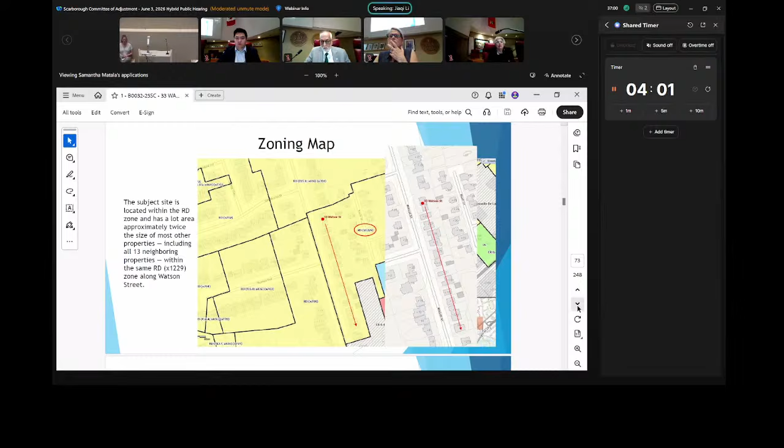Next slide, please. The subject site originally consisted of 2 standard residential lots, each having a frontage of 15.26 meters and a depth of 34.92 meters. A former owner acquired both parcels and merged the titles together to construct the existing bungalow. As a result, the current utilization of the subject site is significantly below what is permitted under the zoning bylaw and is not consistent with the prevailing development pattern within this zone.

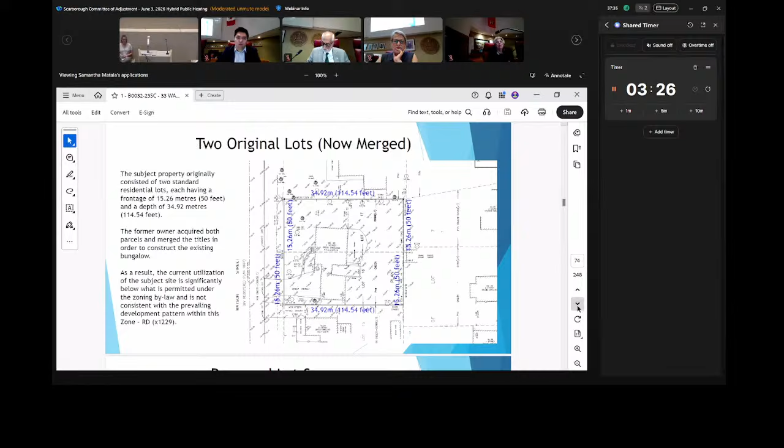Next slide, please. The application proposes to sever the oversized lot into 2 zoning-compliant lots with no variance below the minimum zoning requirements. Part A, on the north side, will be the retained lot, and Part B, on the south side, will be the conveyed lot.

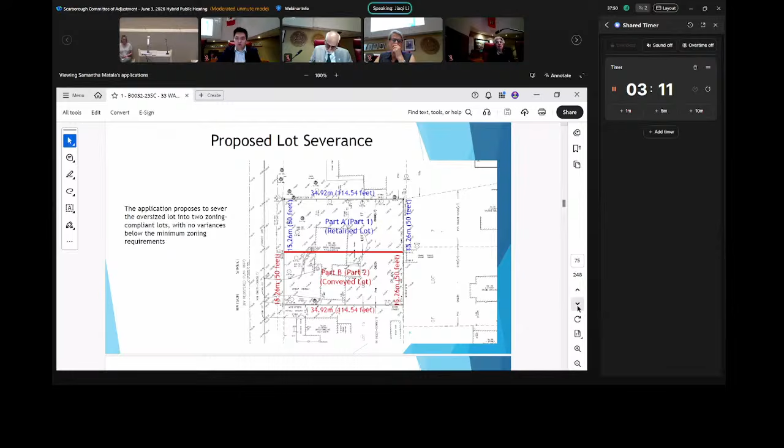Next slide, please. According to the zoning requirement for frontage within this RD zone, the minimum frontage is 12 meters, while each of our new lots will have 15.26 meters. The minimum lot area requirement is approximately 360 square meters, whereas each of our new lots will have 532.9 square meters. So both size and dimension significantly exceed the zoning standards.

Next slide, please. Following lot severance approval, we will complete detailed building design for a single detached dwelling on top of each lot, at the building permit stage, ensuring full compliance with all applicable zoning bylaws and city requirements. Thank you so much.

Okay, I have a question for you here from Mr. Clay. Thanks very much. Sir, I think it's fair to say that a lot of the folks opposed to this application are very concerned with the trees. Maybe before they speak we can get some clarity. We understand that you've now satisfied urban forestry - is that correct? Yes. Okay.

Staff, could I indulge you to pull up the arborist report? There's a page with a site plan with a map on it - wonder if we could call that up. Just scroll down until you get to it. Oh, you just missed it. Yeah, back up. Sir, this is your site plan, which looks like it's identifying the trees to be removed.

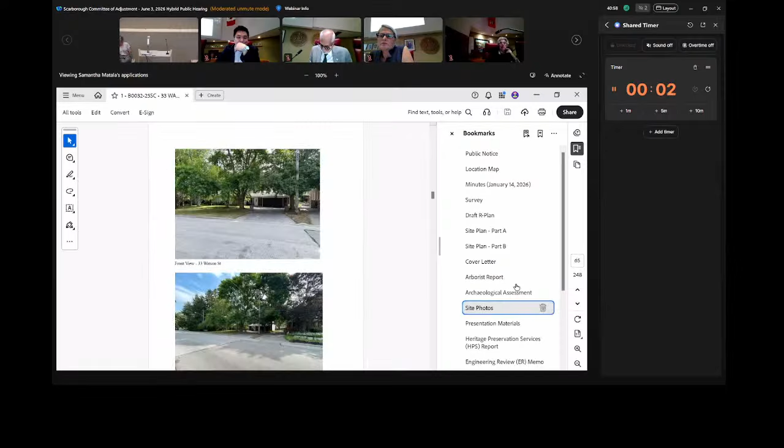I'm sorry, I don't have it on the Committee of Adjustment file, but I do have an updated version provided to Urban Forestry. I don't know what happened. Maybe I could ask you to take a look at this map, if you could call that map up again.

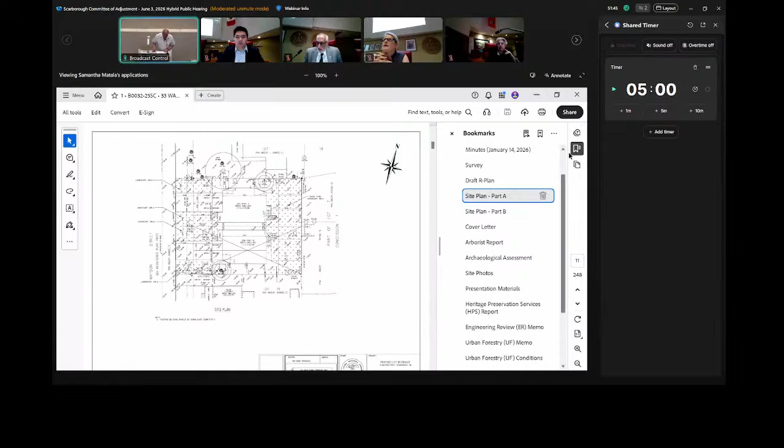I have a question, sir. You mentioned the driveways a number of times—are you suggesting these houses could be built if the driveways were configured differently? Even if you put them side by side, you'd still have to remove at least one tree, right? Well, there's a driveway in place right now, and the property is 100 feet deep. You could move the homes back, not disturb the trees, and utilize one double car driveway, possibly shooting off to the left. So you're suggesting a mutual driveway that splits off at a certain point? Correct, correct. All right, I just wanted to ask that.

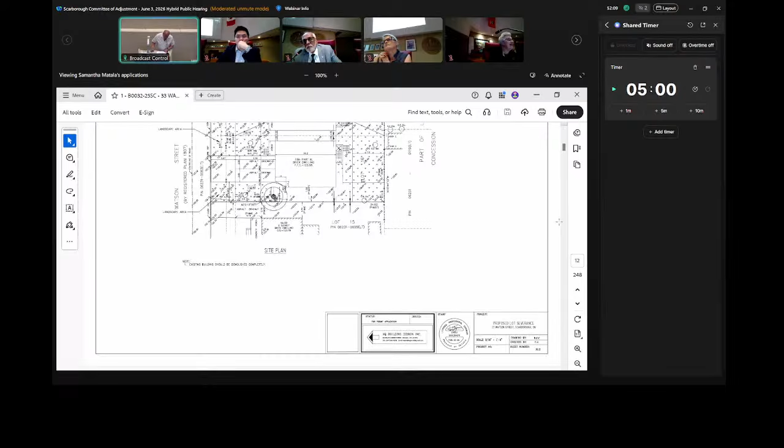Anybody else have any questions? Mr. Khan—thank you, Madam Chair. Sir, did you have any meetings with the developer and raise your concerns? Good question, and I did. I believe we had a meeting on the property in October 2025, where I met the applicant and his father and had a quick chat. I gave them my card so they could reach me any time, and suggested we talk together as a community to work things out. They were agreeable at the time, but I haven't heard from them since until now. Thank you. Okay, anybody else? Thank you, Mr. Yarn. Thank you.

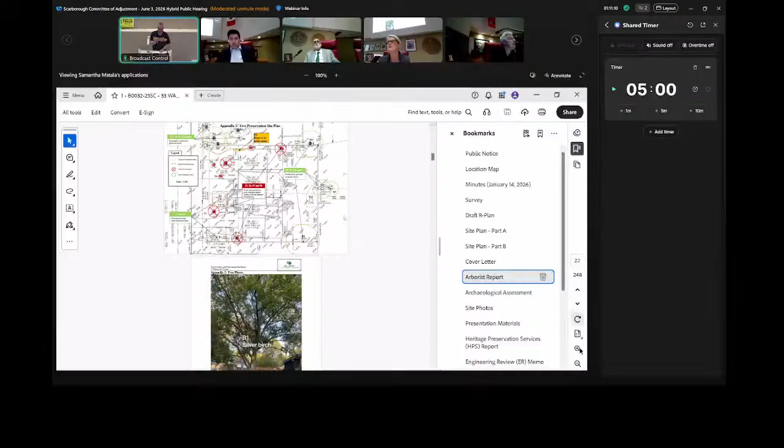The issue is that that tree would then be subjected to the traumas associated with the removal, as referenced by the other speakers. Understood. Any other questions, panel members? Thank you very much, sir.

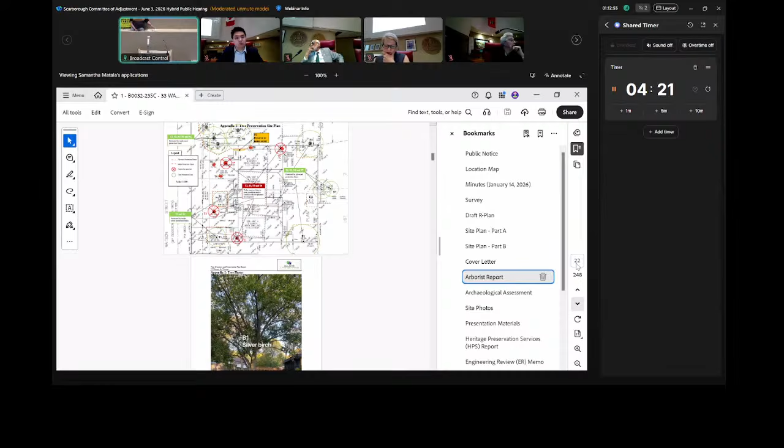Well, not really. I mean, I think the construction is going to impact some of the root base, which is a concern from the residents, so I guess if you could speak to that. But my question is, there was reference to 2 driveways, right? And there seems to be a thought by the community that it could be reconfigured, that you maybe only have 1 driveway to go into both properties to minimize, and maybe you could save another tree that way. And my question was, there's an existing driveway, and it doesn't appear that you're using that. It appears you're moving yours slightly to the left if you're facing the houses you're building, so that's my question.

Sorry, can I ask the owner, if he's sitting right beside me, to answer this question? Yeah, as long as he identifies himself for the record, that's fine.

Hi, myself Li. Sorry, what's your name? Xiaofeng Li, he's the owner. How do you spell that, please? X-I-A-O. Okay, and then L-I or E-E? F-E-N-G, okay, and L-I. Okay, and the address? 33 Watson Street. Okay, go ahead, Mr. Li. I'm just going to have to ask him in Mandarin, and then I'll be the translator, if that's all okay. Right, fine.

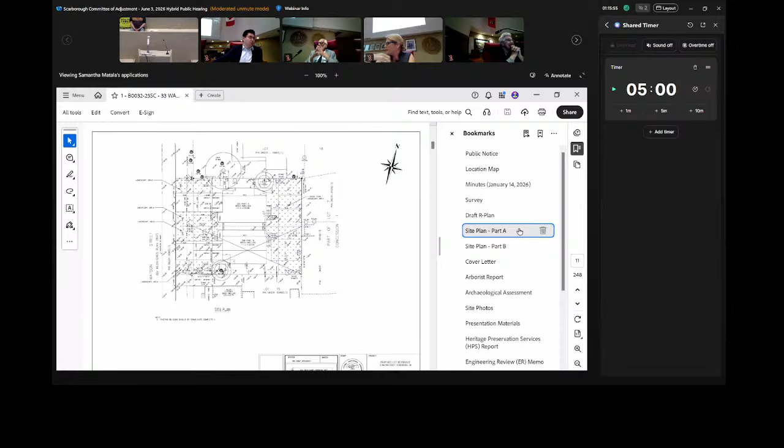Okay, can we just ask, I think you raised a very good question, why? I mean, all you'd really have to do for that Part B dwelling would be, instead of having a straight driveway, to have a curved driveway using the existing curb cut and reconfiguring that driveway with a little bit of a bend to it, which might actually preserve one of the trees you're planning to remove.

I'm sorry, we're only removing 2 unhealthy trees that are almost dead. There's no healthy tree that we're proposing to remove.

Right, but that way you would only be removing one tree. Well, I'm looking at the picture, they don't look dead to me, but, you know, fine.

Sorry, I've been negotiating with Urban Forestry, and according to their observation, 2 of the trees we're proposing to remove are very, very unhealthy, and even if we're not developing anything, we still have the right to remove 2 of the trees because they're very unhealthy and they're in danger. So that's it.

All right, well, I think we're asking these questions just to kind of maybe mitigate some of the concerns about the tree removals here. So if it's one less tree to remove, that's always a good thing, right? And Madam Chair, Ms. McCauley?

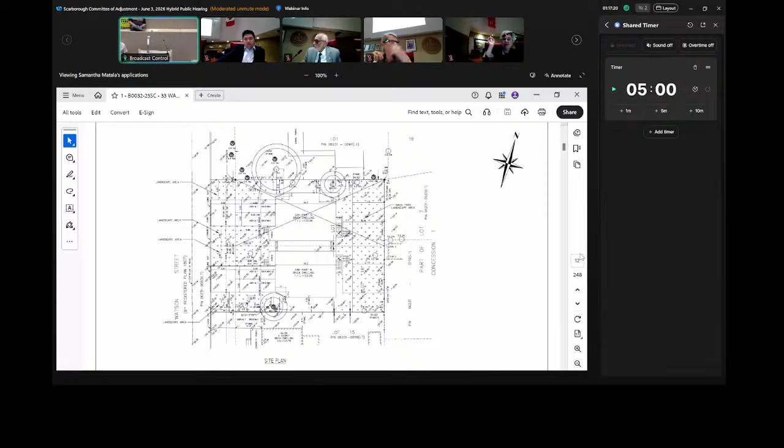Thank you. I'm a little confused as to what trees they are proposing to preserve. We have the map, or the plan, that's been on the overhead a couple of times, but it shows 6 trees to be deleted. Could we bring that map up, and would he identify, he says only 2 trees are being deleted? Would he then identify which 2?

If I can clarify what was talked about in the beginning, number T7 and T3 are the ones being removed. Everything else stays. Yes. Okay.

Okay, so that's the 2 toward the left-hand side there. So T7 is in the driveway. T6 and T5 are also in the driveway. Are they going to be removed?

I think so, because they're under, I think, 30 diameter. Sorry, they're under 30 centimeters, so they're not being protected. That's I believe what Urban Forestry says. So in fact, T6 and T5 and T7, all 3 of those are being removed.

Yes. Okay, and then on the other side, you're showing T2, T3, T7, and T9 to be removed. T9 is at the top end.

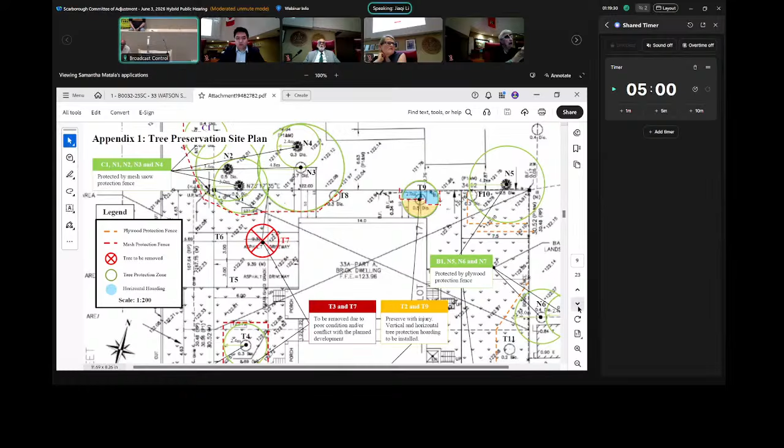No, it's T9, not... will not be removed. Sorry, can you scroll down a little bit?

If I can just clarify, on the map we have, which is not the updated map, through the chair, T7 and T3 are being removed. Can you just confirm T6 and T5? Are they the diameter that you don't need a permit for to remove? Yes. Okay, T9 and T2 are remaining, right.

Through the chair, the plan currently on the screen is the revised plan. Okay, so the one on screen is the new plan that we didn't get.

T3 is also in the driveway, and it's to be removed. And T2 is also to be removed? No, T2 will not be removed. Okay, but T3 will be removed because it's in the driveway. And it's in poor condition, yes.

So in total, I've lost track here. How many trees are you removing? You mean the trees that require a permit or do not? No, I'm asking how many trees on this property are you removing. Four: T6, T5, T7, and T3. Okay, thank you. I do want to state again that two of these trees do not require a permit to remove. They can be removed as of right because they're under the diameter that requires a permit.

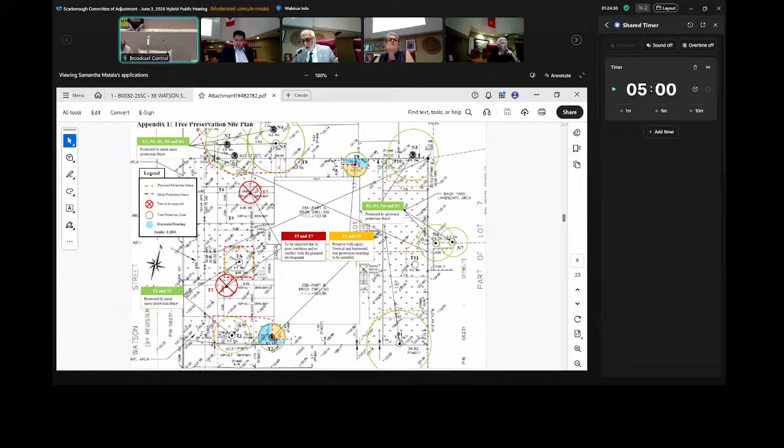It looks to me that probably somewhere down the line, the coordination between yourself and the public or the people over here has been minimal. Had you had a meeting with the presence of the urban forestry representative, I think the problem would have been solved long ago and these people wouldn't have been here and you would have been notified what to do. Now, I don't know how to suggest, except asking you a simple question. Did you ever meet these people or had a committee meeting?

No, I haven't. I have met the owner at 37 Watson Street, I believe, Mr. Bill. I've had a conversation with his wife, Lauren I think, and we were discussing how to protect the N3, the Dawn Redwood. After negotiating with Urban Forestry, asking to stay 4.8 meters away, and then we added an extra meter of overdig, so that's 5.8 meters in total. That's all the neighbors that I've met.

Sir, that is appreciated. You met one person, but I have here the very first person who spoke who is a representative of some sort of committee. Had you had the opportunity to meet them, it would have gone viral and everybody would have been notified and more people would have been involved. Now, I'm short of words here to say, and I don't want to use.

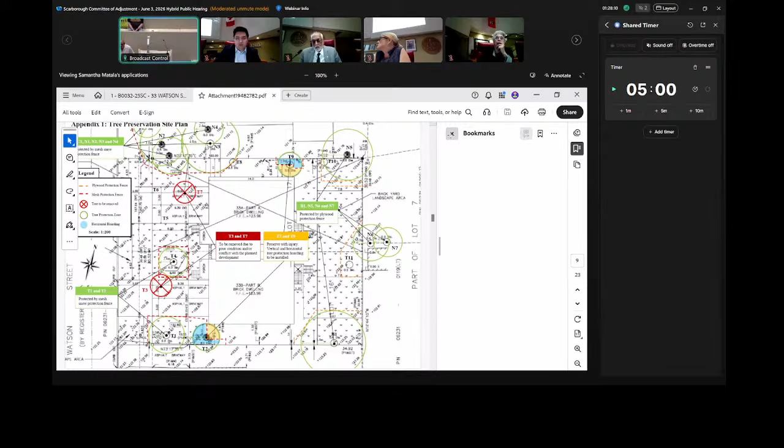One question, Chair. Can we just call up the arborist report again, please? Guys, if we could go to the table, just want to confirm.

It's right there. So T3 is a Norway maple. What does the letter P stand for under condition? Poor. Poor? Poor, yeah, I just looked it up. I was looking for the legend, couldn't find it, finally found it. Oh, fair. So good, fair, poor. Okay, so T3 is what you're referring to, and it is poor, and T7 is the white spruce, and it is also poor. Yes. Okay, thank you, Chair.

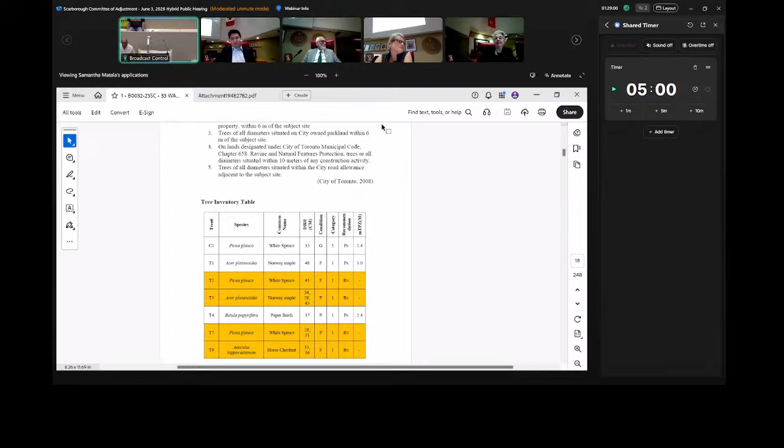You're welcome. All right, we're in committee. Ms. McCauley. I am frustrated, probably as frustrated as the residents in the community.

The desire is to keep the trees, but what we have in front of us is simply a consent application to sever the property. As a condition of consent, we can determine that tree preservation is highly desired, and can approve the tree preservation plan, or at least grant the condition of requiring the tree preservation plan to be approved. However, the one thing we haven't done, and we're not able to do under a consent application, is look at the dwelling units themselves.

We've talked a couple of times about the driveways. We've got a double car driveway. We've got the previous plan. In fact, the plan with the trees on it that I'm looking at was to provide 2 dwelling units with a driveway sort of in the middle, leading to a double car driveway and a double car driveway.

As I said, we don't have the information here of the house plans. That will be a later decision, one that's at the moment only up to the applicant and our building department, to ensure the building is in compliance with all the zoning bylaw. As I said, I'm frustrated. We're building big houses with double car driveways while trying to preserve the trees, and all we've really got in front of us is a consent application to divide the lot in half. I'm putting this forward as a frustration, in case committee members have a suggestion.

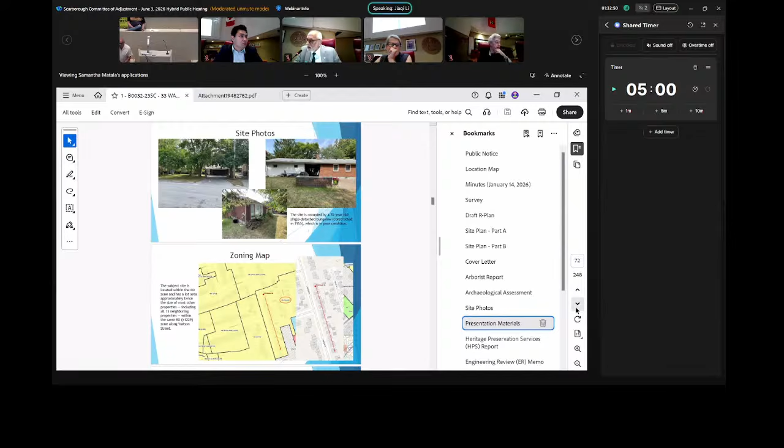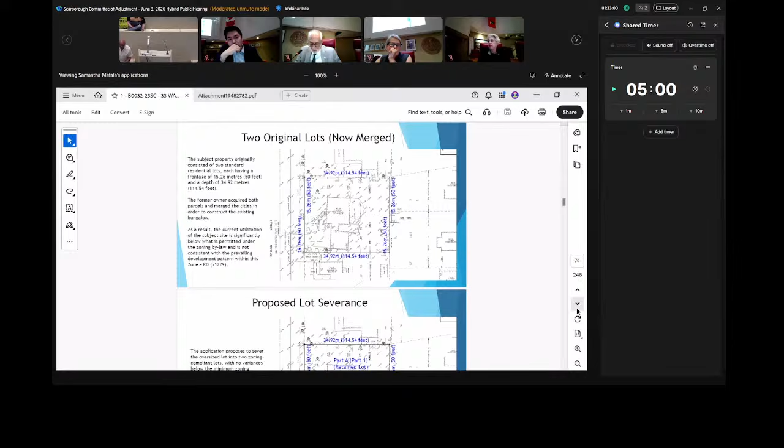Since we're out of committee, can you just clarify, are you intending to build single-family homes or duplexes? Because one of the residents did raise that. Right, so this is a consent application for two zoning-compliant lots, so there's no variance for frontage or area. Duplex is a permitted building plan, so is single detached. I just wanted to clarify, we're not proposing semi-detached, it's not going to be permitted. Whether it's duplex or single detached, I have to confirm with my father. It really depends on the cost of construction and everything else, but the building envelope will be the same. All right, so you haven't made a decision yet on whether it's single-family homes or duplexes, right?

Yes. Mr. Howe wants to ask you something else now. Just a quick question, Mr. Li. You currently have the right to apply to urban forestry to remove the poor condition trees, even if you do not proceed with the consent to sever application. Is that correct? Yes. Okay, that's it.

All right, is there any other questions before we go into committee? Okay, now we heard Ms. McCauley's comments. Anybody else have anything to add?

Mr. Howe? Thank you, Chair. I can comment. I mean, I don't like the fact that the applicant is not preserving T7 by adjusting the driveway location. I think that is a possibility. However, as I asked earlier, I do appreciate the fact that the applicant currently has the right to apply to urban forestry, regardless of the consent to sever, to remove the two trees as of right due to poor condition. So in light of this, I don't see the urban forestry application should be a barrier to approving the consent application. The consent, I don't see any problem with it, and it wasn't something that we heard problems from the speakers here today as well, and it's something we considered last time. So that's where my view lies currently. Thank you.

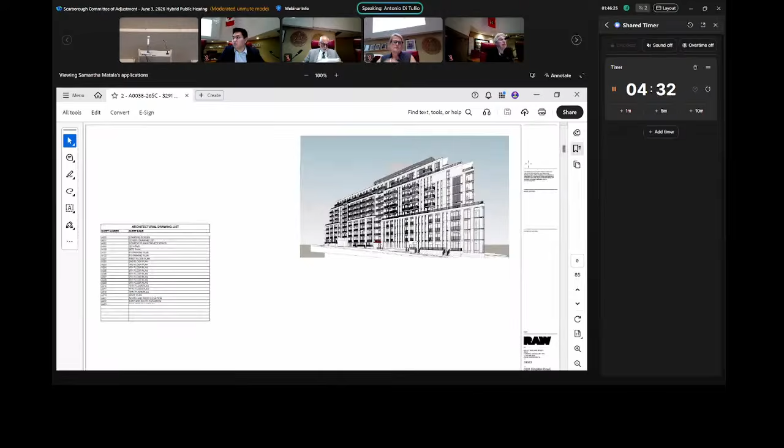Our issue is primarily with variance 9 regarding the 7.5 meter soft landscaping strip. It seemed that the bylaw examiner decided to take a binary approach and in essence excluded it in its entirety, which we think is incorrect. A scalpel approach would have achieved something more appropriate.

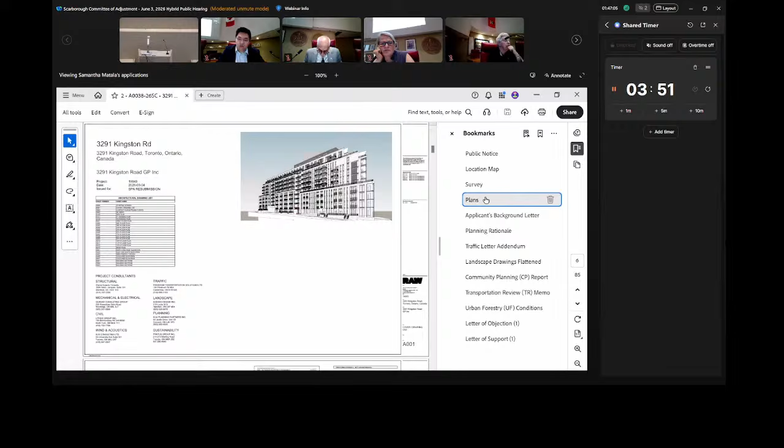That said, we've spoken with LCH and they've been cooperative, and as have we. We just want to make sure our concerns are addressed, primarily because we have many bordering trees. There are stormwater management issues that we are concerned with, and the agreed upon plans at the OLT that you see before you address those concerns. Notwithstanding that variance 9 is a little too broad in our opinion.

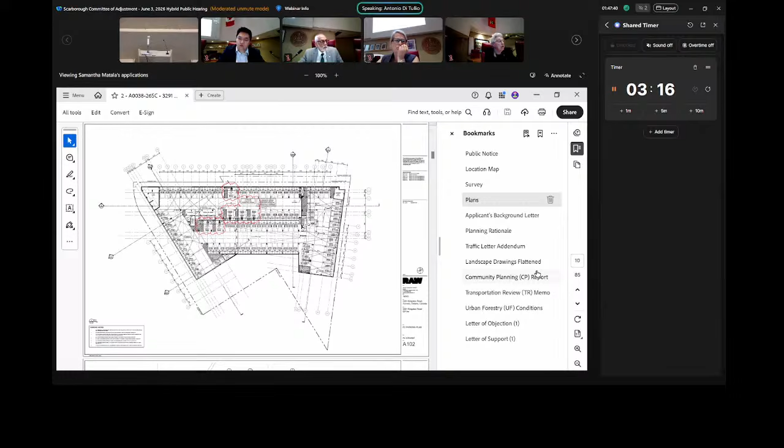LCH in their cover letter to you dated May 27, 2026, has requested, if you look at page 3 on MV9, their wording: we would suggest the committee add a condition of MV approval requiring strict conformance with the submitted landscape plans, as it will give the residents of 6 Windy Ridge comfort that the approval and agreed upon landscape buffer would remain. We respectfully request that the committee adhere to that request, and we are echoing the same request that the applicant has put forward.

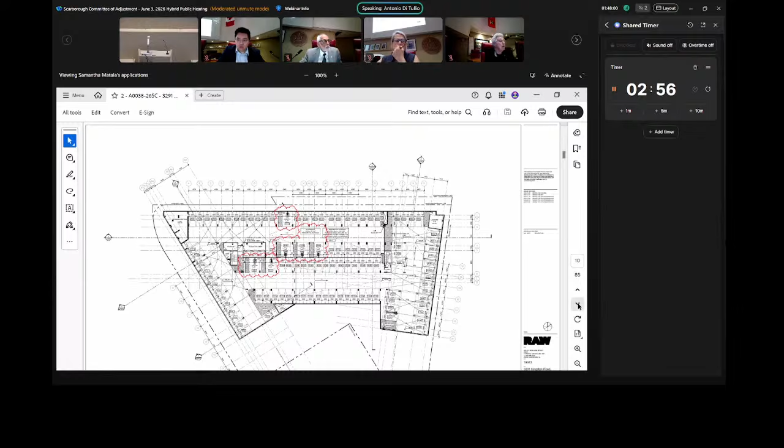More generally on their cover page, I believe in the 4th last paragraph from the bottom, in further coordination with the immediate neighbors and the Residents Association, they're asking the committee to impose conditions requiring substantial conformance to the submitted site plan, landscape plan, and tree protection plan. We echo those requests, but our most immediate concern relates to MV9, and we would ask that it be in strict conformance.

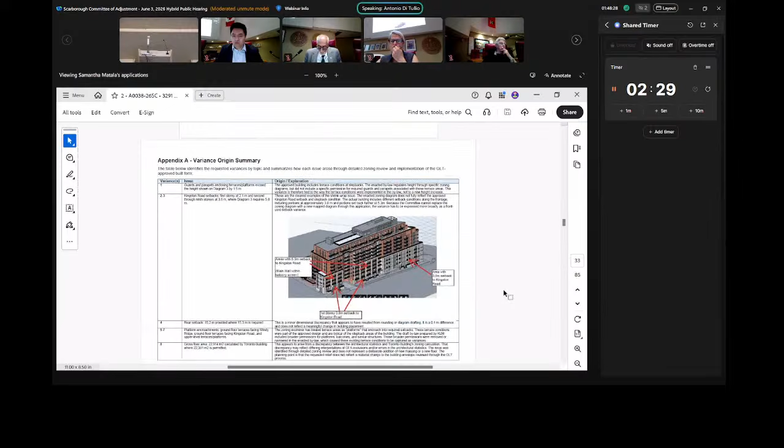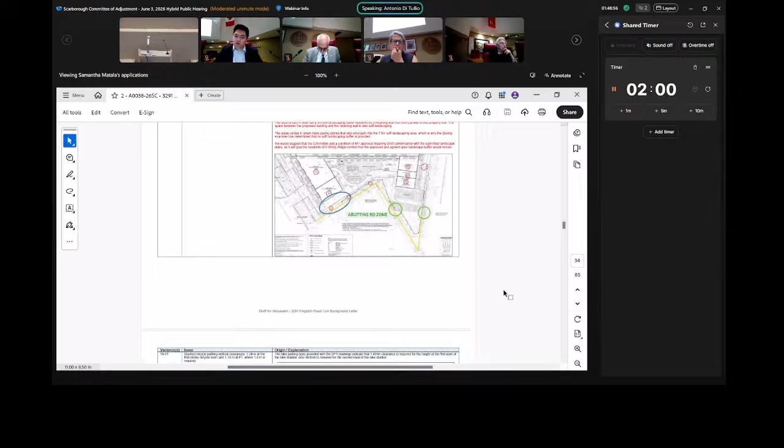Because the parties, ourselves included and LCH included, we went through a lot of pain, time, and effort to arrive at the plans and the built form that was agreed upon at the OLT. We just want to make sure that, notwithstanding that the variances requested are sadly in many cases fairly binary, that they have conditions tying them specifically to the submitted plans as part of this application.

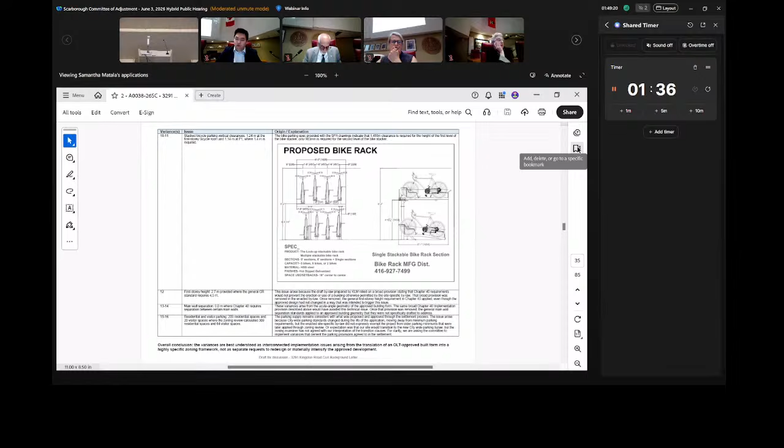Because that'll give us comfort that if the applicant goes away for whatever reason, anybody who steps into those shoes would have to restart the process in essence, and not be able to basically pave up to our lot lines in the side and rear. I think that's it. Okay, thank you. If we could go back to the agent, please.

Good morning, members of the committee. Further to the comments from our neighbor, that is all correct. The owners are proposing that and are comfortable with the approval being tied to the architectural plans, landscape plans, and tree protection plan.

The zoning examiner did take a very, I don't know what the right word is, but not a very finessed approach to wording the variance. We are providing a landscape strip. We are providing 7.5 meters of landscaping. It's a mix of hard and soft. We need a retaining wall that's in there, unfortunately. There's a walkway that also encroaches slightly into that space, and some bicycle parking and a vehicle turnaround that are required for the function of the building.

That was also something we had negotiated with the neighbors to avoid vehicular access from Windy Ridge, to have this other access and circulation arrangement instead. I think we're satisfied with the conditions as they are. I've read the staff report, and I agree with planning staff that these are all technical in nature. I've laid out how the application meets the 4 tests of the minor variance under the Planning Act, and I'm happy to answer any other questions from the public or committee.

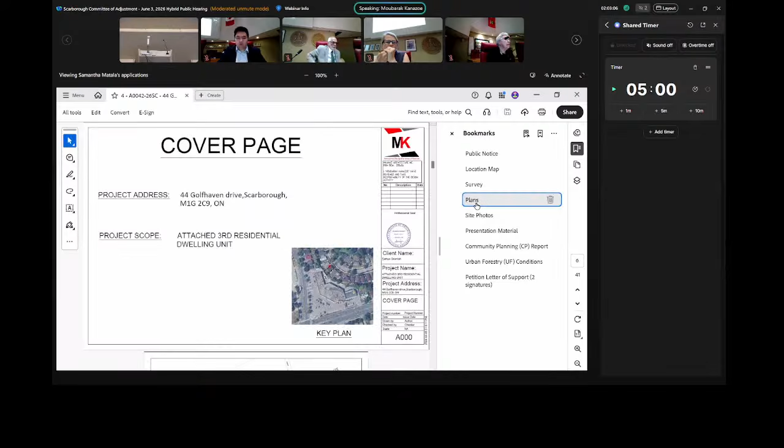Planning is recommending that we reduce the length, and you would like to keep the 20.83 meters? Yes, for the reasons you just outlined. Yes, it mostly deals with wanting to maximize your livable space. Yes. Okay, thanks.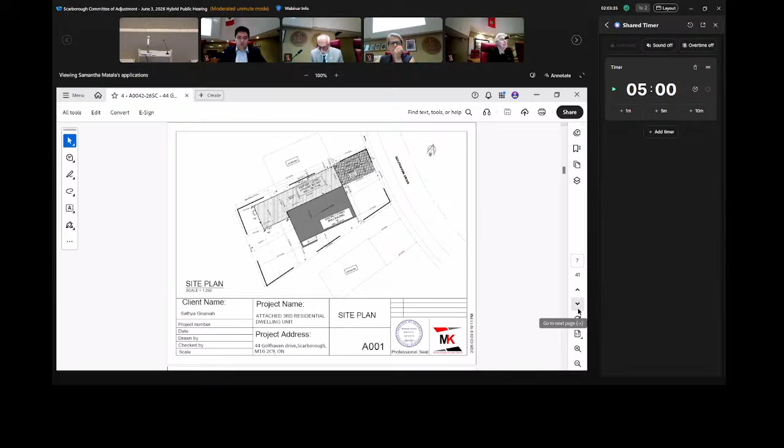Anybody else have any questions? We wanted to maximize the livable space, and the only area we can put the stairs, because the building is narrow, means we can only put them where they are now, with a straight staircase. If we put the stairs in any other location, it will really have a negative impact, and all the space will be very uncomfortable and not make a lot of sense.

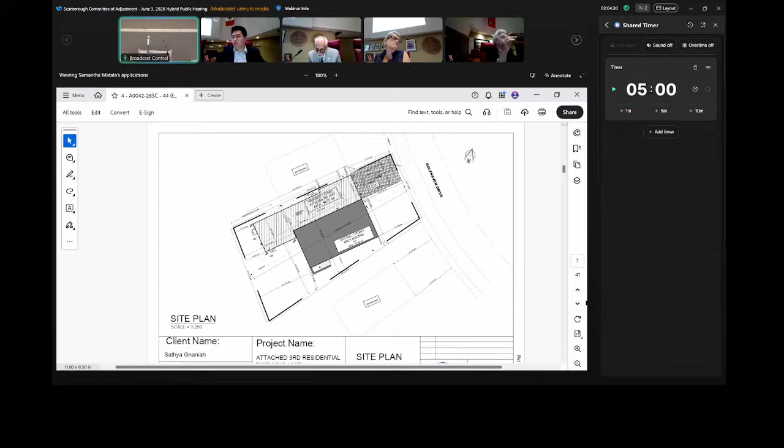Madam Chair. Yes, Ms. McCauley. To the applicant, did you have any discussions with the neighbor to the north, number 46? I hadn't had a chance to meet the neighbor, but we had a letter from the other neighbor. I would let the owners respond to that question.

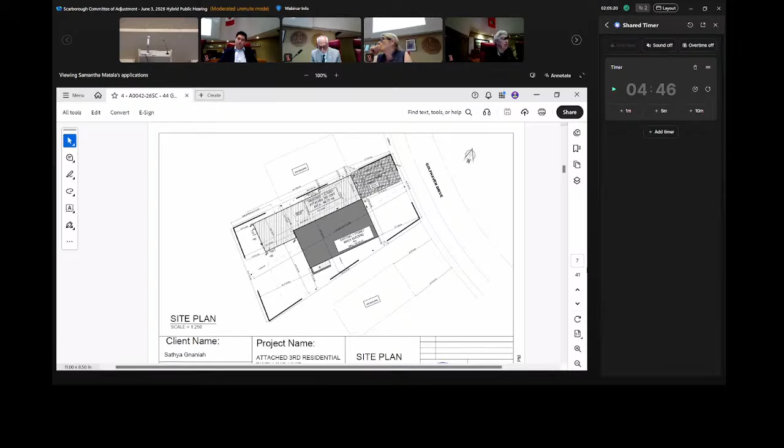Hello, Sathya. Through the chair, Sathya, we see that you're signed in, but you don't have any microphone connected, so we can't unmute you. Please connect a microphone so you can speak. We cannot unmute Sathya as they do not have a microphone connected.

All right, we can't get the owner on the line. The owner was unable to unmute himself for some technical issues. I just had a call with him. He mentioned he was not able to connect with his neighbor due to availability reasons. He's not consistently at home, and he only had a chance to speak to the other neighbors, from whom he got a signature and consent.

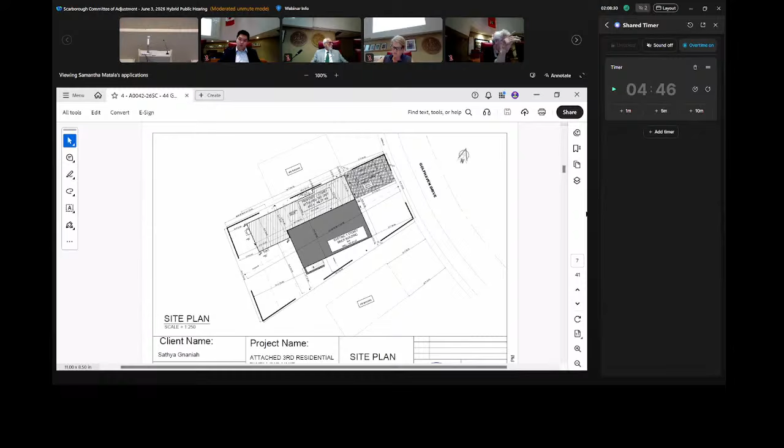I recommend approval of this application as submitted, with the side yard, rear yard, and front yard setback. I am not including the community planning condition to reduce the building length. There are urban forestry conditions, so approval of the application is subject to those urban forestry conditions.

Okay, do I have a seconder for that motion? I will second the motion. I have a motion to approve the application, including forestry condition number 2, moved by Ms. McCauley, seconded by Mr. Plum. All in favor? Opposed? Mr. Howe dissents. All right, your application is approved.

Item number 5, 22 Apsco Avenue. We have before us the public hearing notice, location map, plan of survey and plans, site photos, advisory information from project analyst, Metrolinx, and we have three variances before us.

Okay, is there anybody in the audience on this file? Are you the agent? I'm the owner. You're the owner. Let me just check my sheet here. I'm not showing any other speakers online. Sir, can you identify yourself for the record, please? My name is Hassan Khandakar. I'm the owner of 22 Apsco Avenue, Scarborough. I don't think we need a presentation, but are there any questions, panel members?

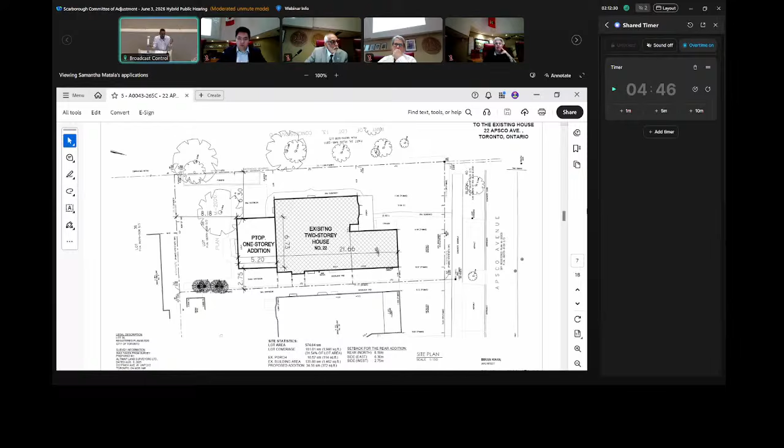I get that. So is it heated, like four season? No, it's not. So you don't have heating, no ducts? No, we have a fan or something from the inside to blow that room, it worked for the kids with a sweater and jacket. They hang there too. Yeah, we haven't gotten that yet.

All right, thanks. Mr. Khan? Thank you, madam. Through you, sir, I would like to know, although you are here for legalization, my concern is has it

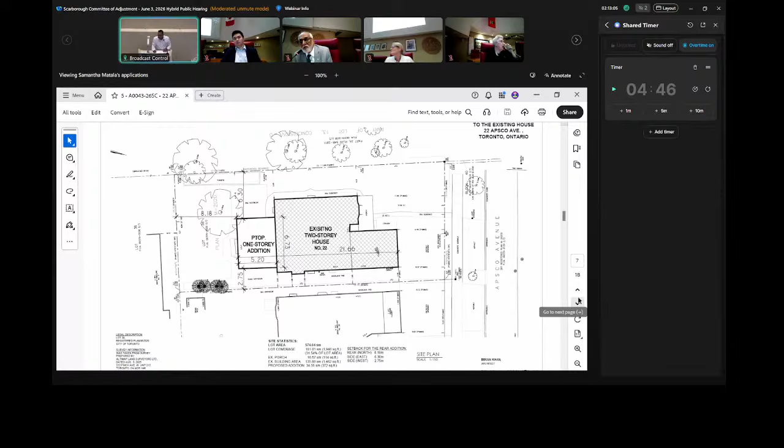been looked at by some engineer for the snow load, because this addition is lower than the existing house, so there is a snow load factor. Was it looked at by an engineer before the building department? Yes, we hired a company, that gentleman working with us, architect and designer and everybody. They submitted to the city all this paperwork, and the person who built it, he's a builder, so the roof and everything was done properly there. So you had building department approval? But this is the first step. Thank you.

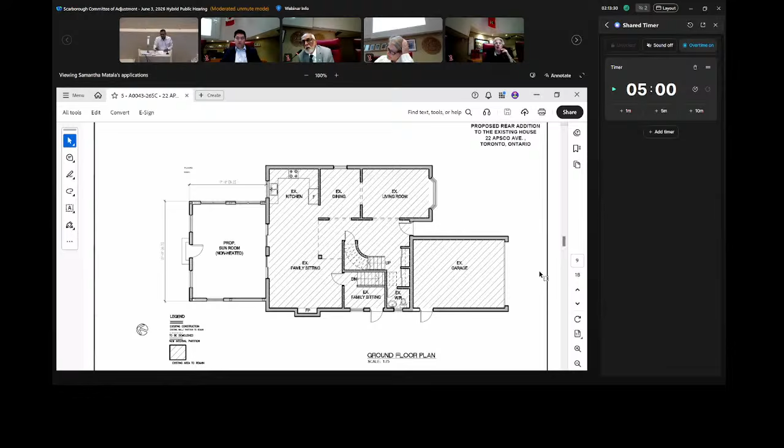Mr. Howe? Just a quick question. When was it built, when was it completed? Sorry, when was the sunroom completed, built? Well, the deck was there for at least 12, 14 years. But the roof, the room covered by drywall and windows, that's like 2 years. Okay, thank you.

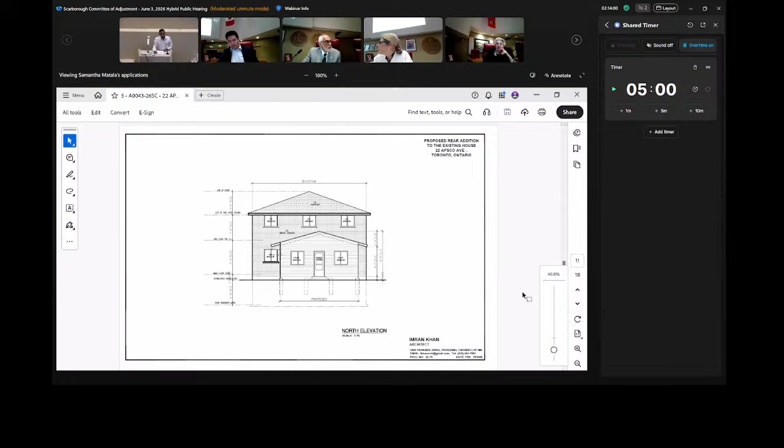Any other questions? Anything you want to add before we make a decision, sir? Well, I know what we did is wrong, and I'm asking for mercy, so my kids and family can enjoy it, and the cost to change or modify anything is pretty expensive right now. If we can keep it that way and go on and enjoy our life, we have an engineer and architect working with us, we'll adjust whatever is needed.

So that's all, I appreciate your cooperation. Just before we go into committee, how did your neighbors feel about it? Do you know, were they upset? There was 12 years, no issues. It's been 2 years since we built it, there's no issue. Nobody came and told me or complained. I asked the neighbors, and one of them already sent an email probably. I don't have many neighbors, I'm in the last house, just one in the front, one on the side, one in the back, and the rail track in front. So there wasn't much issue there.

All right, okay, we're in committee then.

Mr. Howe? Thank you, Madam Chair. Well, we don't condone building without a permit, but looking at the variances before me, it looks minor and meets the four tests of the Planning Act. We received no report or objections from community planning or other city agencies, so I'm prepared to move approval with no conditions. All right, do I have a second? Let's second that, but with a comment. I think you'd agree that I'm always astounded when someone does this kind of addition onto the house by a contractor or builder who frankly should know better. I mean, I get the point that you said he didn't know.

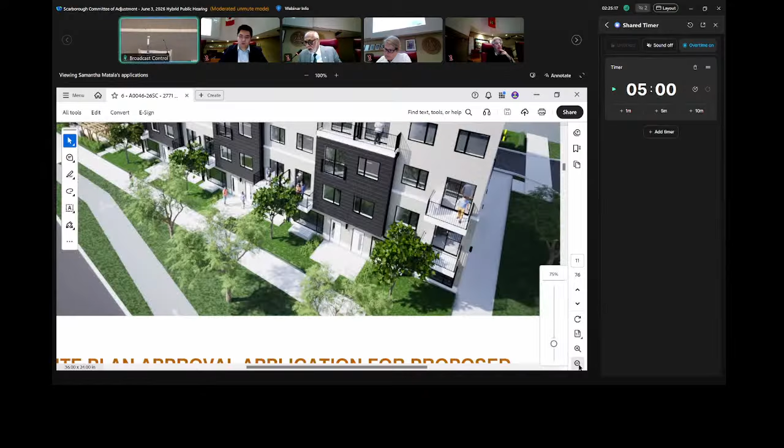Variance number 1, you are saying lot landscape 13%, required is 20%. Where? What is the location? Through you, Madam Chair, so if we can maybe bring up the site plan if staff have that, but the question is, where is the 13% located on the plans? Sir, is it front, back, side, north, east, west? I mean, location.

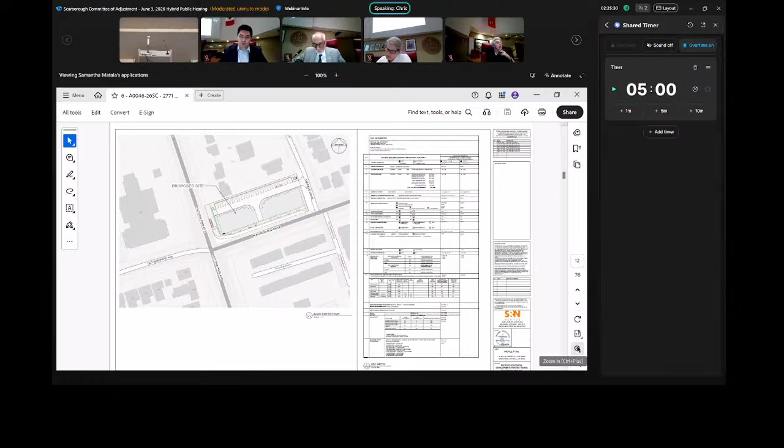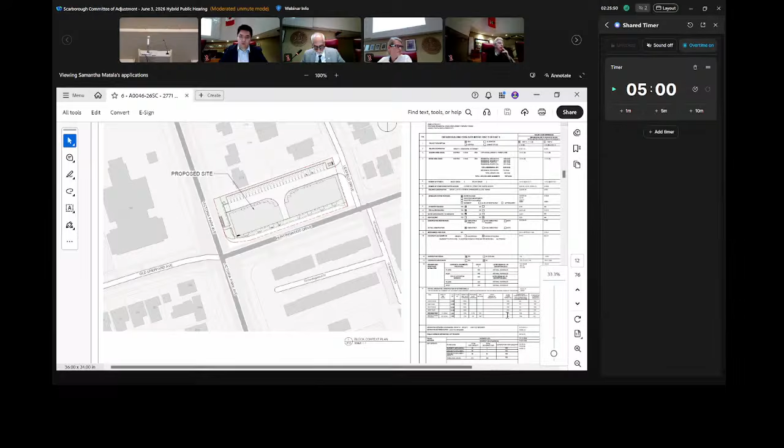Through you, Madam Chair, the landscape locations are really across the entire site. Typically, especially with sites like this in intensification settings, the landscaping is predominantly along the site perimeters, along the landscape buffers, in the front yard setbacks. So that is where you can see the areas highlighted in that greenish tone on the map. You can see where some of those landscaped areas are. So to answer your question, it's north, east, south, west property lines and along site perimeters.

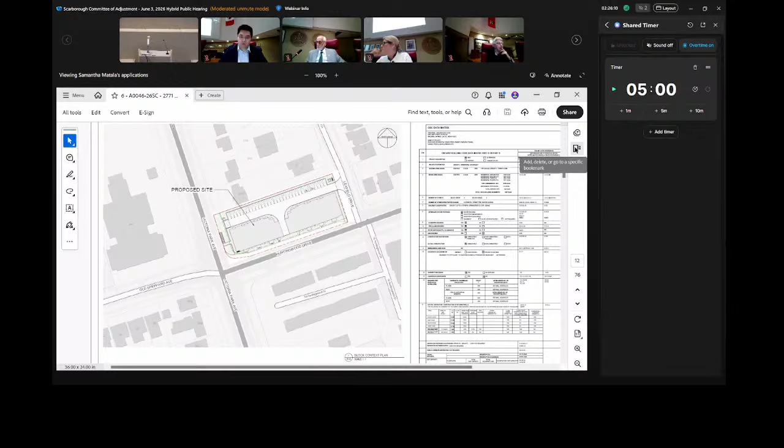Okay, thank you. Now my next question is, variance number 1, 2, 3, 4, they are not minor. How do you justify? Well, each one is unique and they have their own justification.

So, Madam Chair, for example, on variance 1, through discussions with staff and ongoing conversations, something like the outdoor amenity space, which has now been placed at grade within the setback between Huntingwood and the property line, got introduced after the zoning bylaw was approved. The exact locations impacted the percentage of landscaping. And as I mentioned during my presentation, there were reasons for each and every variance that we are seeking.

In a perfect world, my client would be the first one to admit he would love to have known this stuff at the time, but both staff and my client were faced with an impossible decision: this needed to go to council, or else staff had to return application fees, which was never going to happen. So staff and my client had no choice but to proceed with the approval. In a perfect world, could we have held that back a couple of months and worked out some of these issues? Of course, but that would have passed the threshold of the 120 days at that time. Those rules have since been amended, but at the time, that's what we were dealing with.

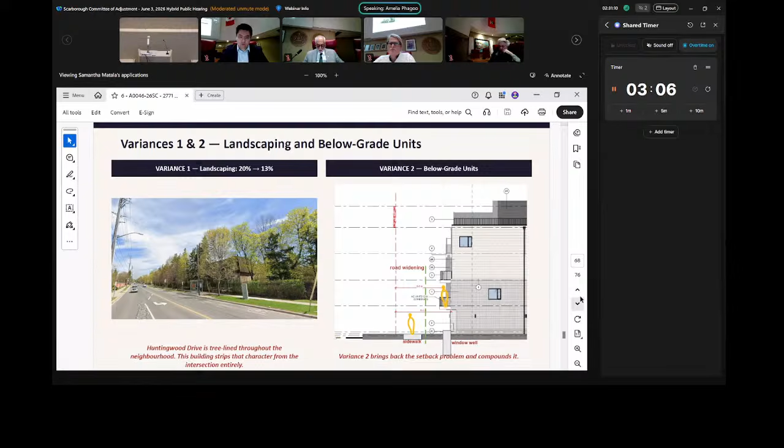Next slide. On variance 2, below-grade units are not currently permitted for good reason. The below-grade room is set barely 3 meters from the sidewalk, as you can see in diagram 2, with no ease from public to private realm. There's insufficient natural light or outdoor space for these residents. And just think about the winter, piles of snow would cover the full setback.

That's the view from your front door and your unit window. That's barely livable, and it's a way to squeeze more floor area out of a lot that cannot support it. When you consider how little space there is between the building and the street, variance 2 creates subpar units and makes the setback problem worse than before.

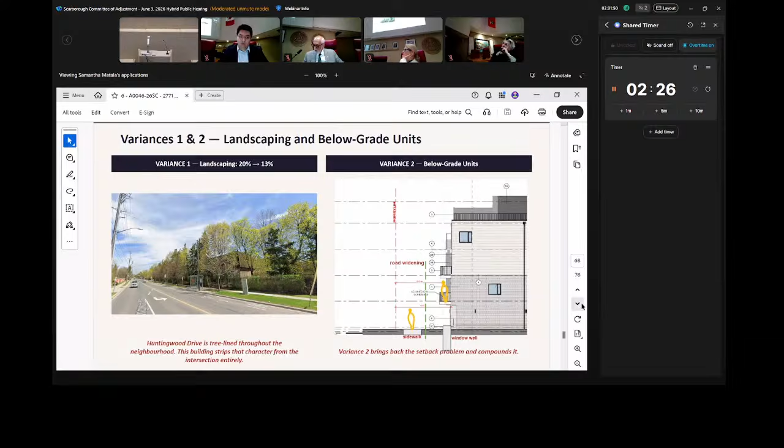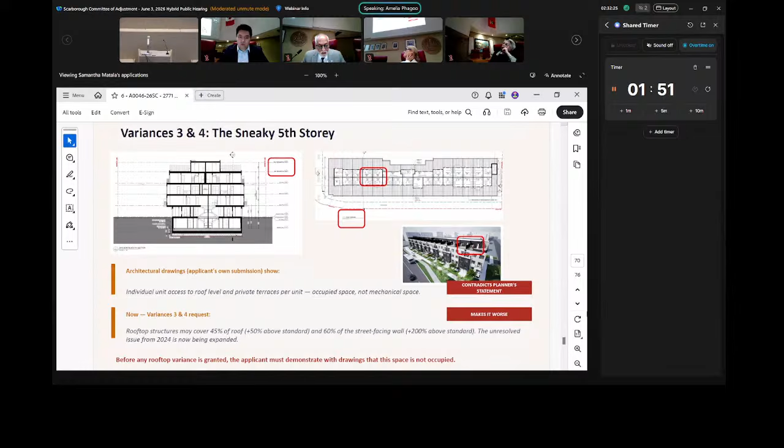So you can see here that this is clearly a 5th story with occupied space. There's people on the balconies and the terrace, and it's still being glossed over 2 years later. So how can a 50% rooftop variance be approved when it's being misrepresented?

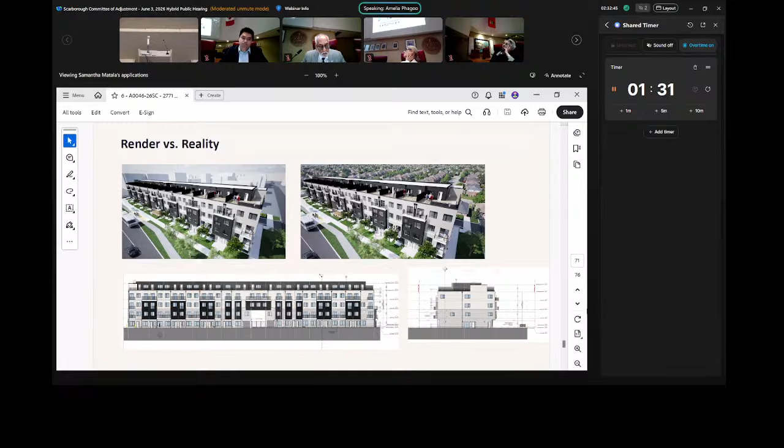Next slide, please. The proposed building is 3 stories taller than the school across the street, and any building over 2 stories in the whole vicinity have large setbacks that create vital green space. In neighborhoods like this, the city calls for gentle densification. This mid-rise condo, which is not a stacked townhouse that it's marketed as, is not gentle and doesn't respect the existing physical character.

What actually faces Victoria Park is service space, a fence, and an unsightly 5-story wall with uneven windows. That's the first impression that this neighborhood or anyone arriving from the west will get of this building, and it's just a sad main entrance for the residents themselves. This is a hideous afterthought facing a major road and a welcome to Scarborough from Victoria Park.

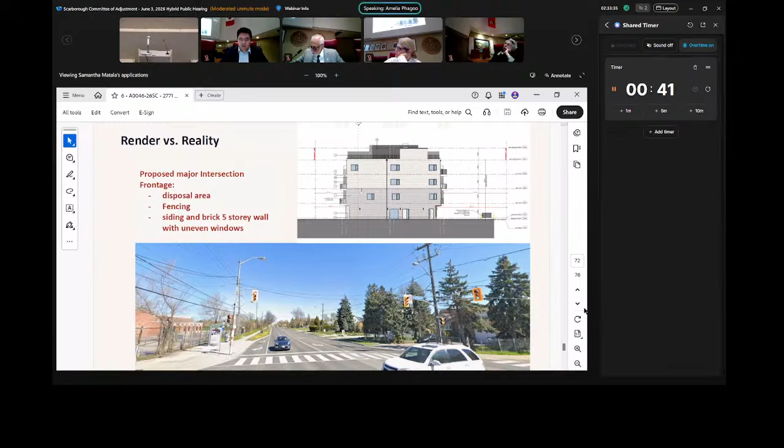Next slide. This will be talked about with Omar, I believe. Next slide.

To summarize the applicant's justification letter, it's just 3 paragraphs that say the same thing in different ways, which is that this should be approved because the project's already been approved previously. The letter adds that these variances exist because of the pressure of provincial approval timelines, but that's not a justification, and frankly, it's no one else's problem to absorb.

Next slide, please. We're asking you to draw the line, because if something is going to be added to this community, it should be done right and with care, with real consideration for the people who already live here and the ones we're welcoming in the future.

Thank you. Panel members, any questions for the speaker? Seeing none, thank you very much for your presentation. Were you able to reach Omar?

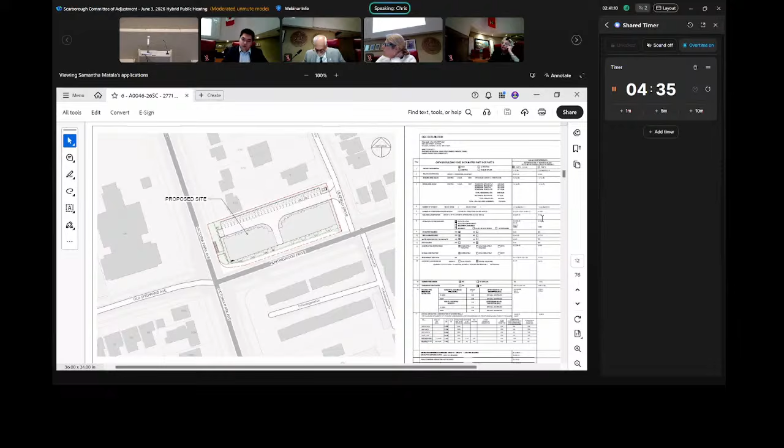Certainly, I'll start with the most recent comments. Starting with accessible parking, that's a good question. If we look at the site plan, we'll notice that while the spaces are proposed to be 3.4 meters, there is a 1.5 meter shared hatched area designed exactly to address his concern about the opening of doors, Wheel-Trans, or other aspects. This is shown on the plan. So we have a hatched, demarcated 1.5 meter strip between those two spots designed exactly to achieve the intent he outlined. It's not a case where we're expecting 3.4 meters to be the extent of the parking, as is common practice for accessible parking. There's often this strip of land between two spots precisely to achieve the desired intent.

Moving on to the bike parking questions. Again, this is entirely contained within the interior of the building, which impacts nobody surrounding the proposal. If we're talking about commentary on usability and how he envisions them being used, I'd suggest usability is dependent on the user, and if a user isn't content with what he sees, he simply wouldn't purchase the unit. That's really a marketing consideration by the owner. If they feel comfortable selling the units given the bike parking arrangement, that should be a marketing consideration for the owner.

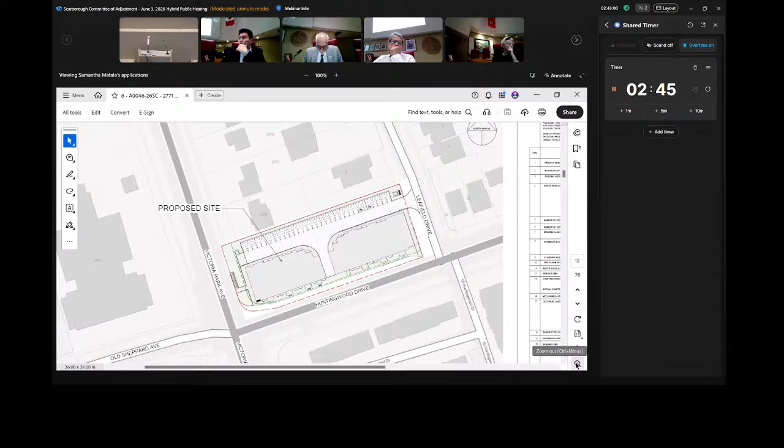Moving to the previous commentary about stories and heights. Again, through you Madam Chair, the mechanical room is not a story. It's not a story under the zoning bylaw, and it's not a story under the building code. There is no version of this conversation where that is determined to be a story. There was also reference to this being a mid-rise building. Again, it's not a mid-rise building. We have a 4-story building within a neighborhood with a 4-story designation. This is precisely the type of intensification envisioned by the official plan that has frontage onto arterial roads.

I believe I covered off everything, Madam Chair. There might be some follow-up, which I'm pleased to continue discussing.

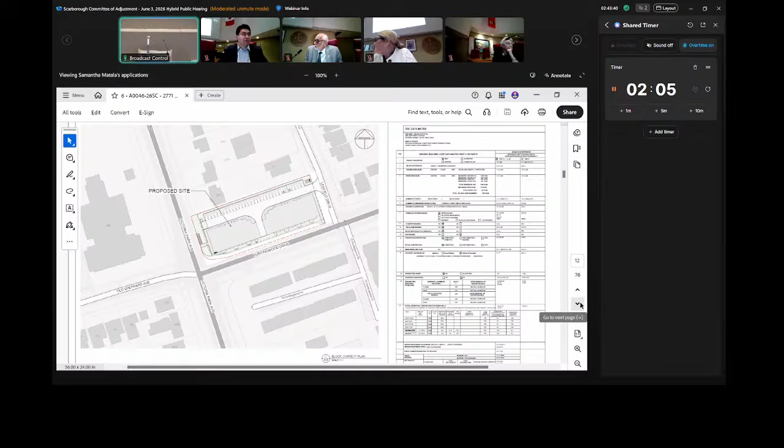Mr. Clay: Thanks, Chair. I understand some of the concerns raised by those two speakers in opposition. However, this application was, for all intents and purposes, more or less already approved. The variances before us are just modifications that come through an evolutionary process after you do site plan, little tweaks, little technical amendments. I don't think it measurably changes the building envelope, nor does it really change the impact on the surrounding neighborhood. I'd note this is on a major road, and the land assembly has already taken place.

The frontage of the units on the second, third, and fourth stories, and the terrace on top, front major roads and aren't overlooking into anyone's backyard or front yard. It's the kind of accommodation I think council's trying to achieve. It's a corner lot, I don't see any real challenge. I think it's a pretty good proposal, and I think it's supportable.

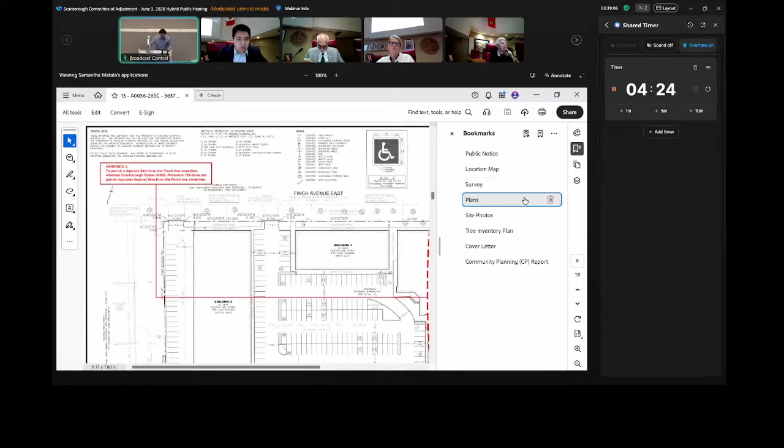You have our planning opinion before you that the variance or proposal meets the four tests. This plaza has always been considered for retail, commercial, and service uses. There are no industrial tenants, no overhead doors, no loading docks, and most importantly, to support this future use, there is a residential community about a 10-second distance across the street on the other side of Tapscott Road.

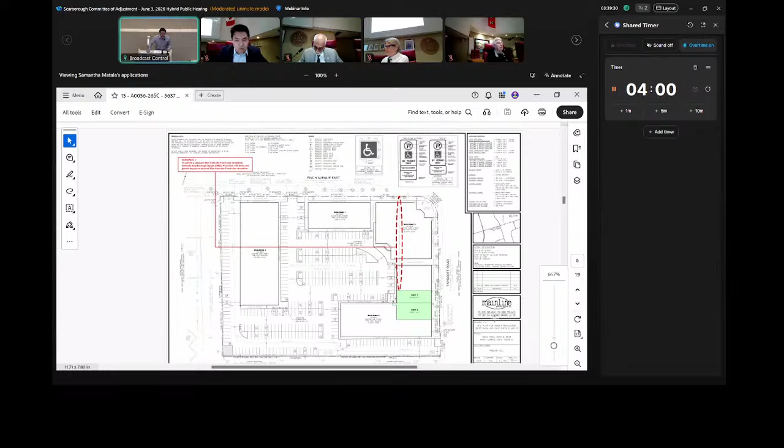So we believe that the proposal meets the four tests. It's appropriate given there's residential across the street and it is in a general employment area, not core employment, which permits all types of retail and service uses. If you have any further questions, comments, or concerns, I'm more than happy to answer them to the best of my ability. Thank you very much.

Mr. Quay, did you have a question or is your light just on? Okay. Anybody else have any questions? No?

All right. Have you had a lot of discussion with planning? We've had discussion with planning, and from our experience with emerging policies pertaining to 680, 668 that have not been approved yet, they're unwilling to change their position in previous cases. So we decided to proceed with the application today, just given the history.

And we've had deferrals on other applications in the past. Committees have recommended we go and discuss with staff. But from these policies, they're very unwilling to change their position. Okay.

Sure. Oh, Mr. Quay? Yeah, so just to be clear, if the policy that is currently before the minister for approval were approved, this use wouldn't be allowed, or would there be a path forward under that change that would allow you to have some form of a similar type of use?

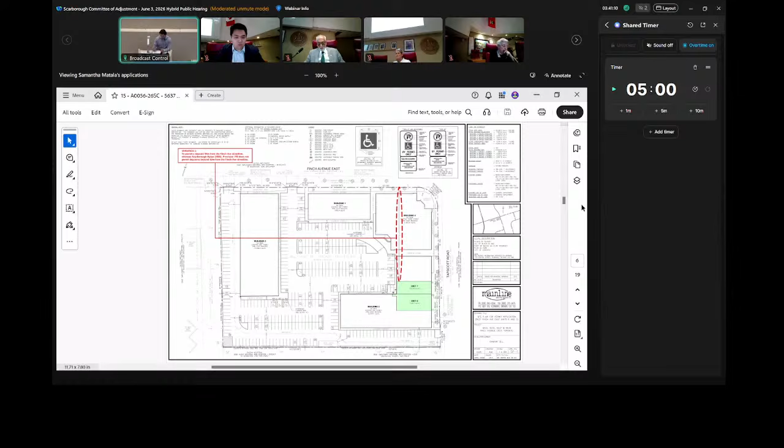Through you, Madam Chair, I believe OPA 804 changes the wording to ancillary retail and services, but regarding whether this use would be permitted with the future official plan in effect, I can't comment on that because I don't know how staff would interpret that policy. Given that they're recommending refusal, I don't know what the alternative solution would be. I'm just evaluating the proposal on the current enforced policy right now.

No, I understand. Sorry, I thought you might have a better sense than us about the nuances of the new change to the OP. Yeah, it's complicated, but for the matter before the committee today, from our previous experiences and tribunal hearings, they defer that the current policy is what's in force. I can't comment on the future policy at this time, just because I don't know how staff would interpret it.

Sorry. Right. Although community planning appears to have a good sense of where this is going. I mean, they're recommending refusal. If it were with those policies in force, I don't know what the alternative measures would be that they would recommend as an approval path. But I can only go on current policy.

No, I apologize. I understand. I just thought that if there were a path forward to get you where you want to get to under the new provisions, would that be an alternative for you?

Through you, Madam Chair, I'm not entirely sure. Could you repeat the question, please? If you look at the last paragraph in the planning report, they say new day nursery uses are not permitted, so there would be no path forward. What I'm trying to get at from a technical perspective is whether that would be something that could be done in the future or not. Sounds like not. Pretty clear from planning's perspective, not.

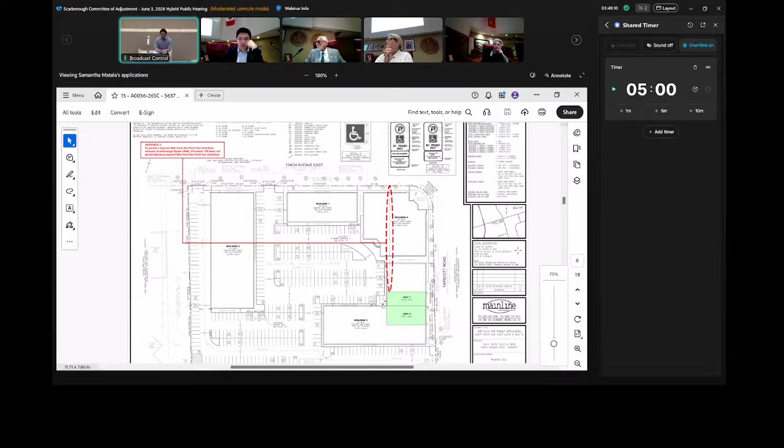Yeah, I did notice the residential community across the road. Then looking at your floor plans, often daycares have some sort of external play yard. Is there an area for kids to play outside here?

Through you, Madam Chair, that is currently being considered in a building permit application that's ongoing. On the Tapscott side, not the right of way, but there's a landscaped strip adjacent to the units. There will be fencing and bollards placed there, and the proposed play area will be in the side yard. I don't know if it's shown on the plans before you, but it is clarified in our building permit application currently with the city.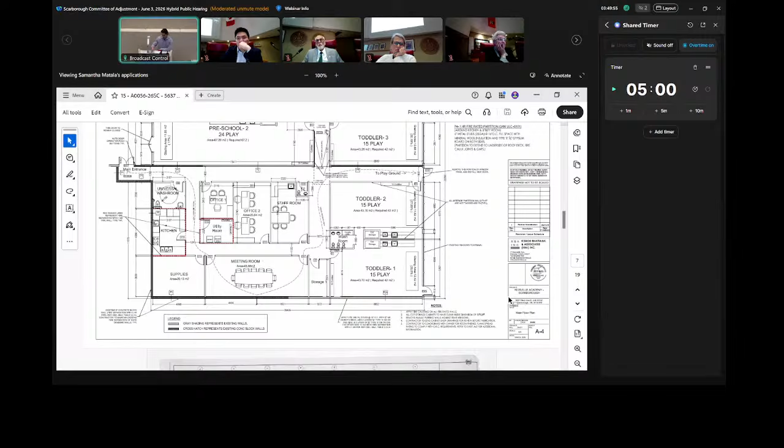I can, if this light here works, project it on the overhead. No, you can't. Sorry, I'm not sure that's helpful. Go up, keep going, one more.

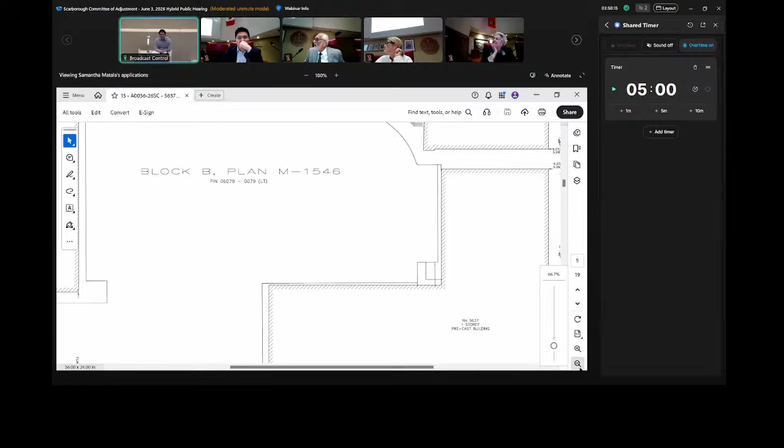Yeah, that one. So roughly where would the outdoor area be on the map? Through you, Madam Chair, if you could see those units in green on the screen in front of you, just to the right of those units there's a landscape strip approximately 6 meters wide on the owner's property. There would be about a 30 meter by 6 meter play area, with fencing and bollards. That is clarified in a building permit application, but that is the approximate area of where it would be.

It might be shown on that plan in front of you in some opaque line weights, but I'm not 100% certain, I can't see that from here. It's 6 meters to the sidewalk, from the building to the sidewalk?

Yeah, and you think you can get a fence put there? Through you, Madam Chair, there's about 6 meters from the back of those units to the property line, and then maybe another 2 meters to the sidewalk on Tapscott. We believe we can get a fence in there. That is considered under the building permit application, but I don't know the status of the review, if there's been any comments on the fence, but none that we've received as part of the minor variance application before you.

It would be a chain link fence or something? Through you, Madam Chair, it would be a chain link fence with bollards surrounding it, just to give some additional safety measures for the children. Right, because if it's at the driveway where you go in, it would be a sight obstruction, right? So you can't put board on board or anything to kind of buffer the kids more.

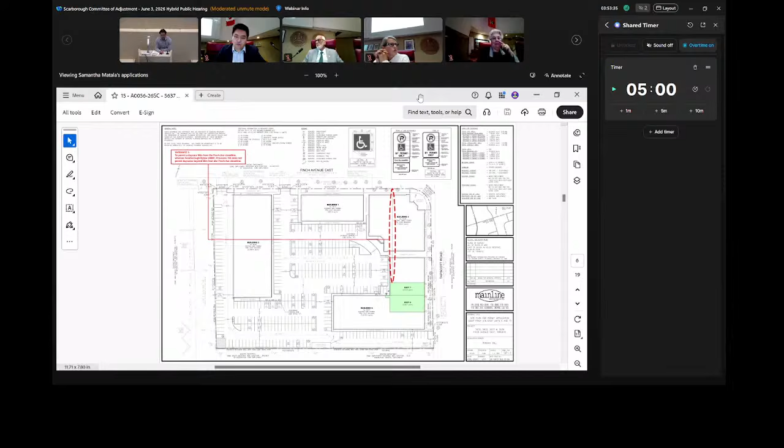Anybody else have any questions? Take it into committee then. Any comments? Ms. McCauley? I'm going to comment.

Daycare uses are often squeezed into employment areas because that's where the people that use them most need them, so I've seen all sorts of daycare centers with minimal outdoor spaces. This building, the adjacent building, is predominantly an office building, has Government of Ontario Community and Social Services offices in it. So I know generally it's a lot of clerical staff. I don't know that the daycare uses would be for the employees of the area, or whether it's just another use for daycare in the general community. The residential communities are on the other side of the road.

As a matter of policy, I think having a daycare center at a place of employment is a good policy. It is a convenience to the employer, a convenience to the employee, and following all the rules and regulations, I've dealt with a lot of daycares, it can be made suitable for the residents. So the fact that this site that they want to put the daycare in is 100 feet away from a permitted part of this site is astonishing. We're talking 100 feet. Move you 100 feet north and you're okay. So with those comments, I would recommend approval of this application.

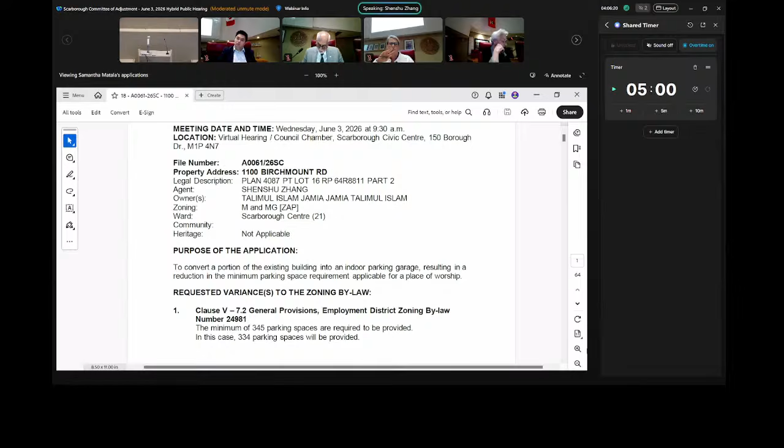And we have this issue because when we apply for building permits, the zoning examiner has a different idea about the calculation of the GFA. And as per his calculation, we need 11 more parking spaces. But actually the users believe that they have enough spaces, and also it has very convenient access to public transit. The bus stop is just beside on the corner. So that's the reason we believe that this variance is very minor.

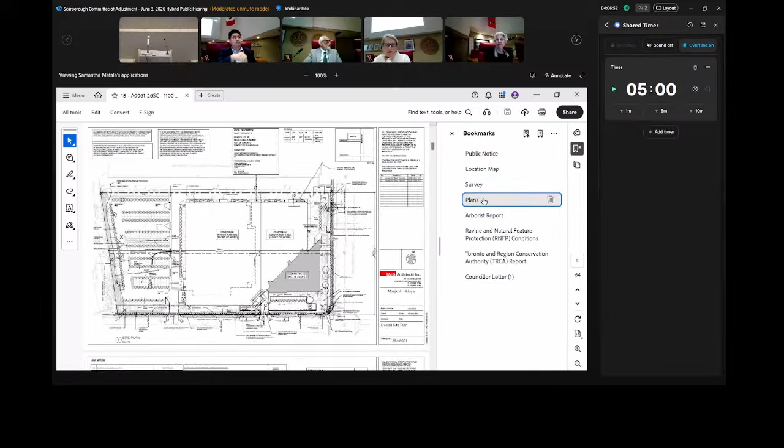Okay, anybody else have any questions? Okay sir, we don't have any more questions. Anything you want to add before we go into committee?

No. All right, panel members, we're in committee. Mr. Howe. Thank you, Chair. I move approval of this application. There's only one variance before us. It looks minor. It meets the 4 tests of the Planning Act, and this approval is subject to RNFP condition number 2.

Okay, do we have a seconder, Mr. Clay? Okay, so we have a motion to approve the application as it meets the 4 tests, including the ravine and natural feature protection condition. Moved by Mr. Howe, seconded by Mr. Clay. All in favor? That carries unanimously.

Thank you, sir. Item number 19, 16 Bugle Hill Road. We have before us public hearing notice. We have a revised public hearing notice with amendments. Variance number 1 is changed to 3.46 meters. Variance number 3 now reads 24.19 meters. We have a revised site plan, floor plans and elevations, a cover letter from the owner, an arborist report prepared by Tree Doctors, Inc., as well as a construction report prepared by them. And we have planning also has conditions. And I don't show any speakers other than the agent and the owners.

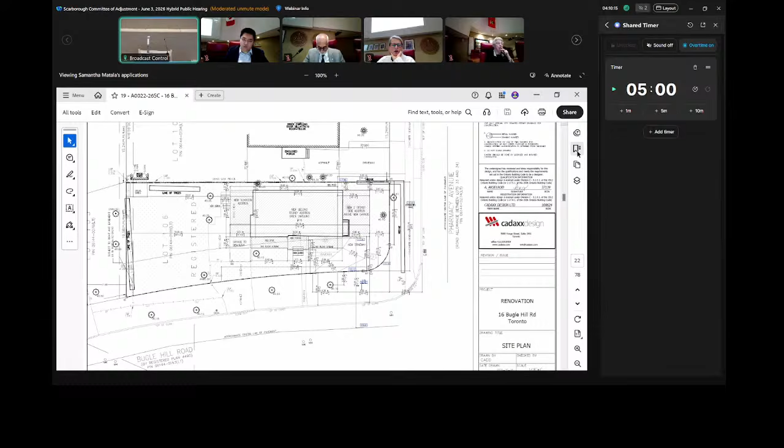Okay, so you're okay with tying it to the site plan, but not the height? Yes, I'm okay with the site plan, but I'm not okay with the height, it can be changed. I'm not 100% sure how much it will change, that's why. Okay, and then condition number 2 is, so just so I'm clear, you have a problem with condition number 2, which is the right elevation? Yeah, yes. Okay, so if it's only tied to the site plan, it's okay? Yeah, definitely, 100% okay with it.

Okay, can we just clarify - so community planning wants it tied to that elevation to restrict the height? I'm not sure, I'm just trying - it's for the piles, it should be piled, not on the footing, because there are trees not to damage the roots. That's why they tied it to the elevation. I understand your reason for not doing that, and that's laudable, you don't want to damage a tree. But I'm just trying to get an understanding of why planning - does it say in their report why they want to tie it to that elevation?

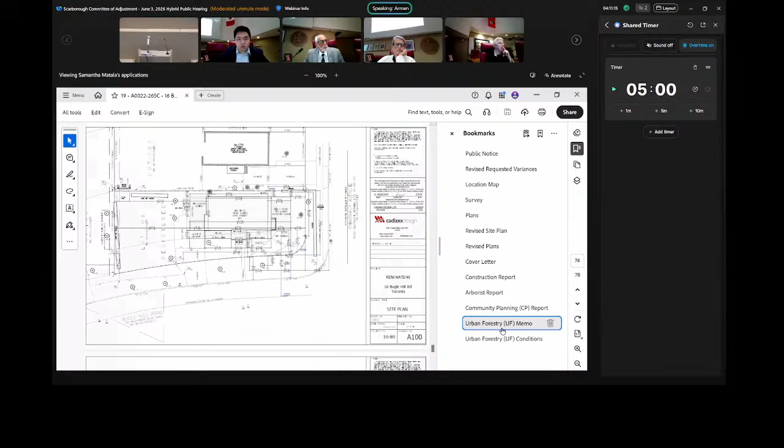When you look at the site plan, you can see that in that elevation it's showing that it's on the piles. Yes, it should be - that's why they tied it to that part, to that elevation, to be 100% sure that it will be on the piles, not the footing. So the site plan would do that though, right? Yes, the site plan is there, but the height is not on the variance. But I don't know how the examiner, when I go to the permit, maybe they can say okay, it should be this height because it's tied to the decision. That's why I need to be flexible there.

So it says they tied it to the right elevation to ensure the addition is constructed as designed in regard to the pier foundation. Yes. So what you're saying is if we tied it just to the site plan, that would still have the same outcome? Yes, definitely, it's gonna be the same outcome, it's gonna be on pillars. It's gonna be the same. Okay, that's all for me, thank you.

Any other questions? Okay, let's take it into committee for a decision then.

Anybody? Go ahead, Mr. Khan. Thank you, Madam Chair.